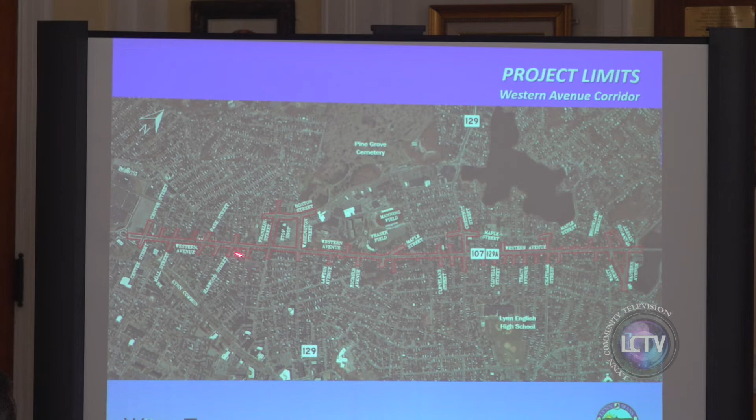So it includes that. As we continue up the project along Western Ave, Maple Street, where it comes out near Bayview, and then once we get close by right here, it includes the Chestnut Street intersection, and then down to the Maple Street and Chestnut Street intersection. All that kind of works together.

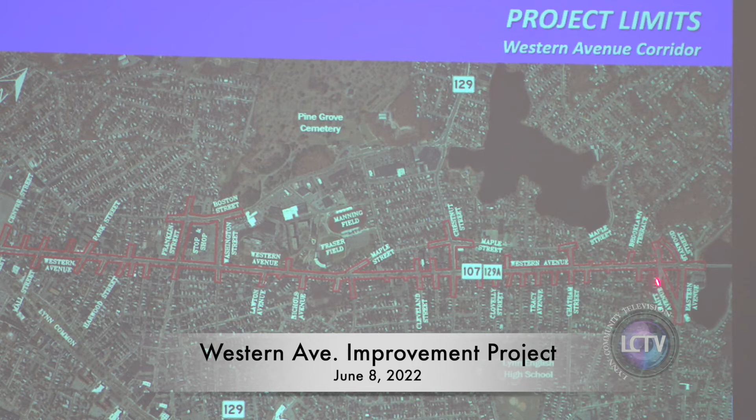And then as we continue up all the way to Eastern Ave, that loop around portions of Wade and Eastern, and then we don't quite get to the roundabout down here, but certainly the legs of the intersection. So you can see it's a pretty extensive project. It's about 10,000 linear feet, so it's almost 2 miles.

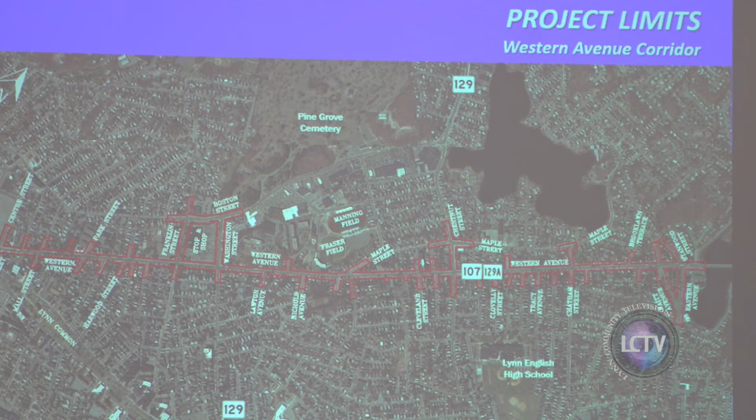Some of the key locations on the project, obviously you can see where the traffic signals are. Those are all signalized intersections. We're also going to look at things like the intersection of Park Street. We all know what that's like as well. A lot of traffic is one way, but certainly a lot of traffic.

I used to live on Park Street. Actually, I was born on Park Street. Well, not born in Union Hospital, because that's not there. Any case, you know, all my history.

But all of these signalized intersections, key locations, signalized intersection at Wade and Western Ave, but also there's no signal at Eastern Ave at Western Ave. How many of you had an easy job getting out of there? Nobody, right? So that's why we're looking at that. Likely signalized intersection here, but where we have signalized intersections that are close by to each other, those are all coordinated together so that they work together so that we're getting good progression along the corridor.

Alan's our senior traffic engineer at WorldTech, and if we have questions about that later, Alan can go over those with you as well.

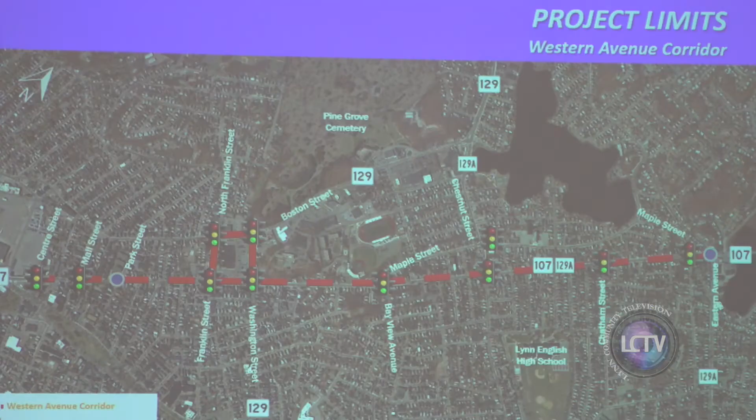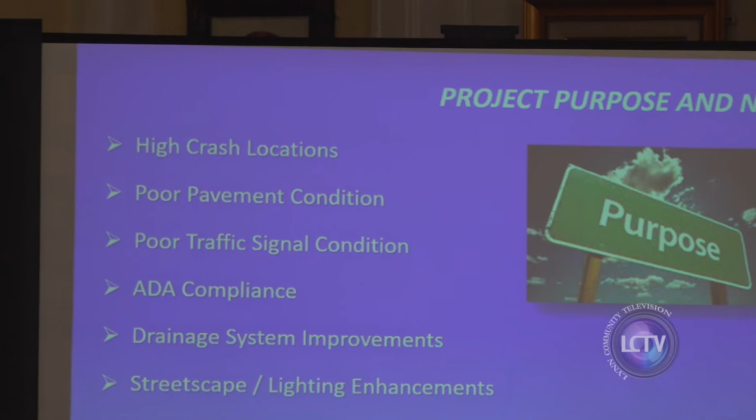So again, purpose and need, why are we doing this? There are several high crash locations that have been identified by MassDOT along the corridor. The pavement condition is poor. Traffic signal coordination - you get a green light and you stop at the next light, right? And then you stop at the next light. Having great progression going down the street.

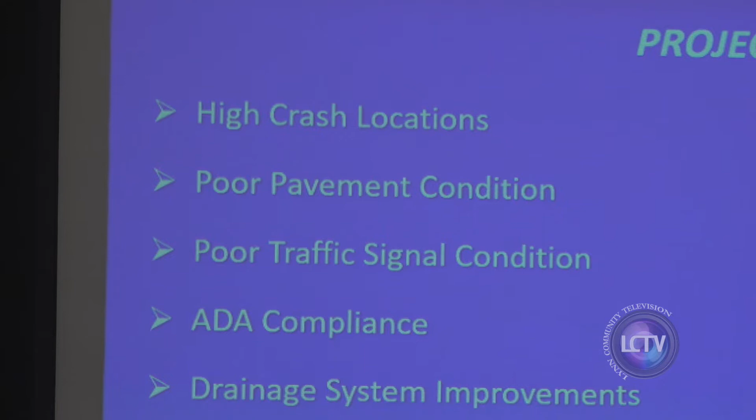ADA compliance is pretty much non-existent. Drainage system improvements, streetscape and lighting enhancements where we can do that. Consolidating bus stop locations, enhancing bus stop locations. We'll be working with the MBTA to coordinate improvements from their perspective. We'll be doing that early on. And really, this is a complete streets project.

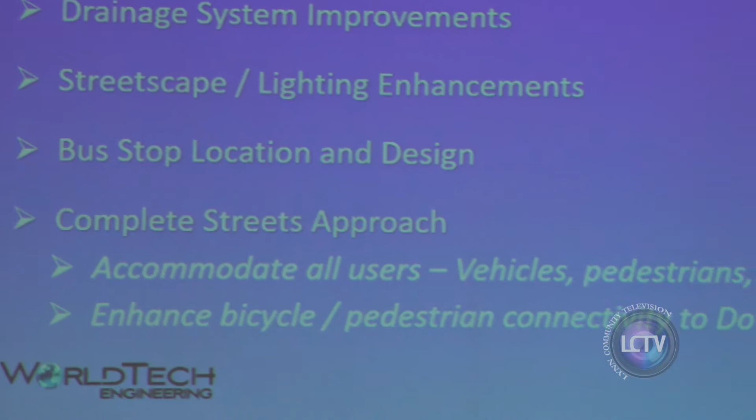So what does that mean? We're accommodating all users, right? So it's vehicles, it's pedestrians, it's bicycles, and it's transit, all of that. And that's part of MassDOT's healthy transportation policy.

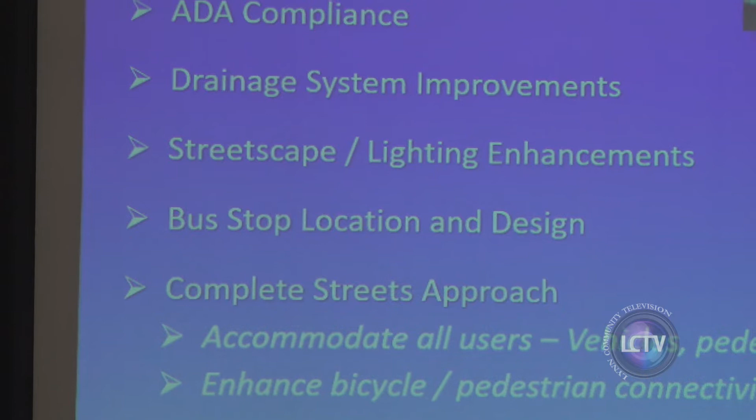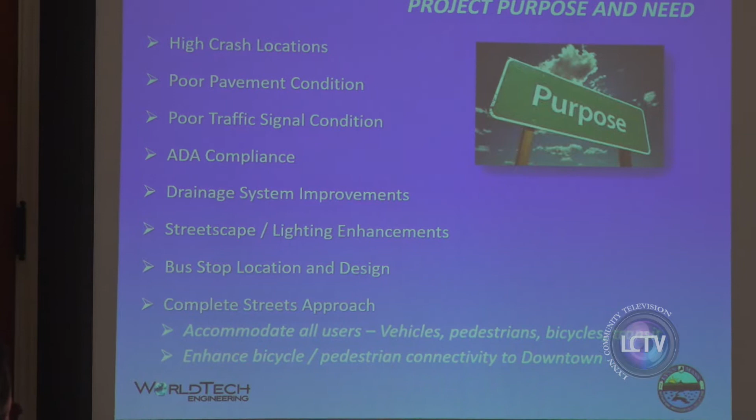Also, as part of that, enhancing bicycle and pedestrian connectivity. We know that right now we have the Northern Strand coming through Lynn. More and more commuters are using bicycles now. Western Ave doesn't really accommodate that, and so we want to make sure that we're incorporating that as well.

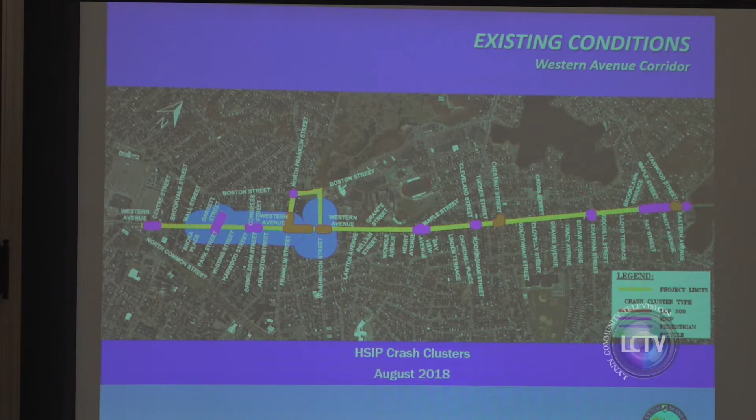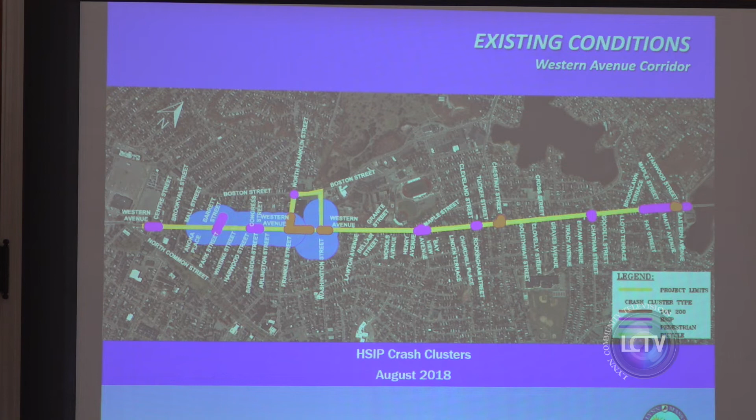Some of the existing conditions, you heard me talk about the high crash locations, right? So these blue areas are pedestrian crash clusters. These purple areas are just HSIP locations. That means Highway Safety Improvement Program. That's been identified as high crash occurrence locations. And you can see where they are.

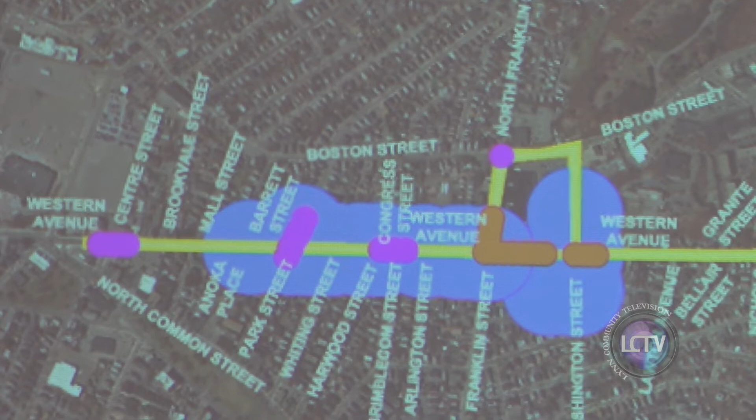And then you can see top 200. So MassDOT identifies high crash intersections. They have a list of the worst 200 intersections in the Commonwealth. And several of them are located on Western Ave. And so that will be addressed as part of this as well.

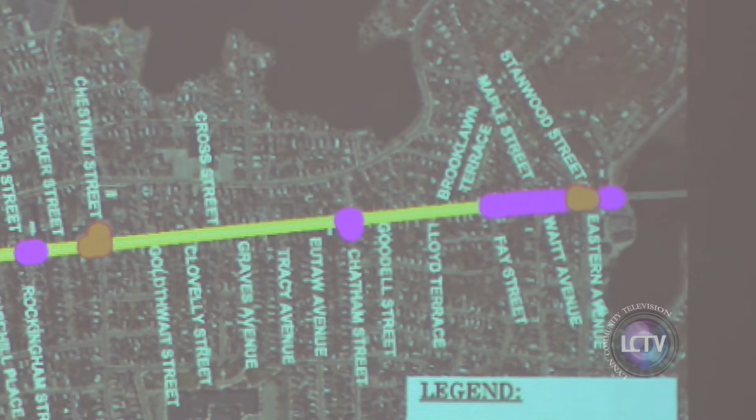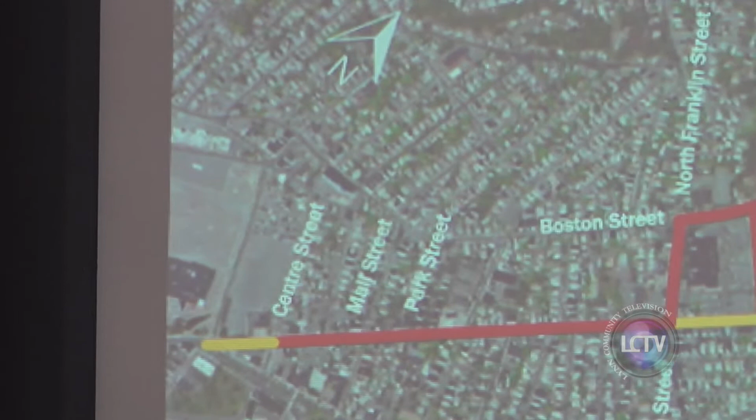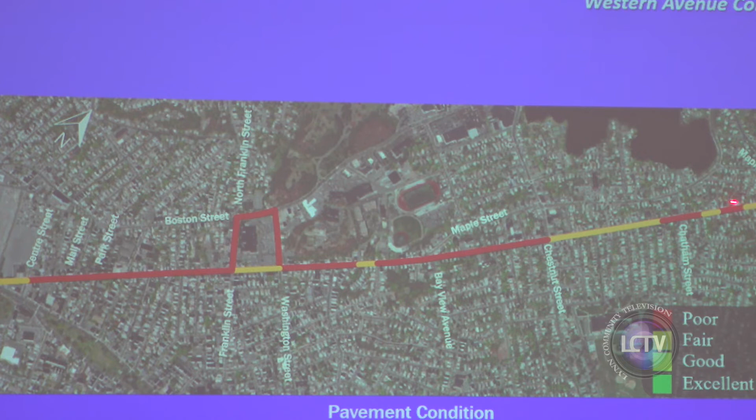Similarly, the pavement condition - we took this off the MassDOT road inventory file, and you can see that this red is poor pavement, and I don't have to tell you that. Right? Poor pavement condition, especially around Boston Street, around Washington, Franklin Street, these parts of Western Ave. There's a couple of places that are in fair condition. There's one place that's in good condition, which is right down here near Eastern Avenue. The rest of it is fair, so you can see it's fair to poor condition throughout the corridor.

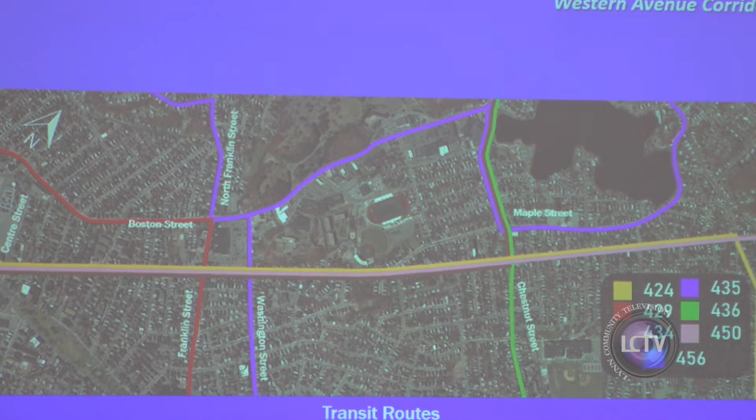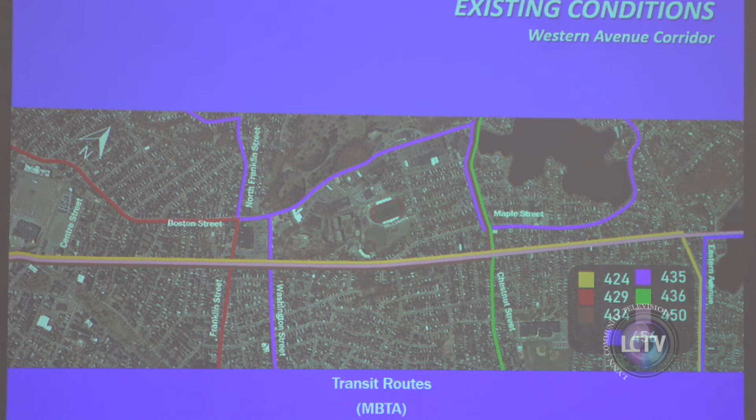Western Ave is a heavy transit route. You can see all of the MBTA transit routes. Several of them go down Western Ave. So it's going to be important to enhance transit opportunities along Western Ave with bus stops, working with the MBTA on things like transit signal priority, which allows the buses to get through more easily. And so that'll be part of it as well. But this just gives you an idea of all the bus routes, the 7 bus routes that are either on Western Ave or in proximity to Western Ave.

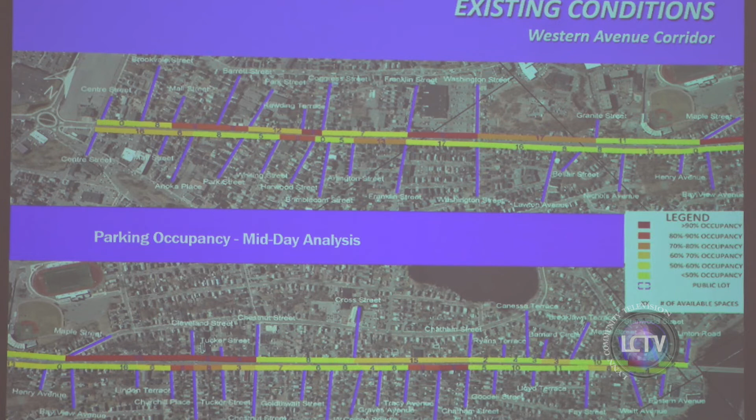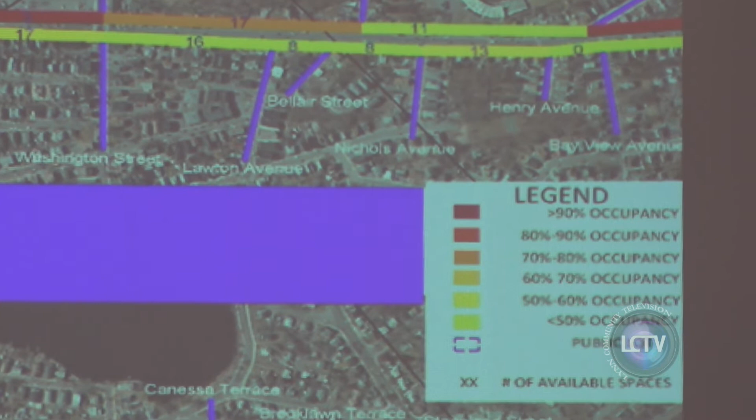We also did a parking inventory because we know that's going to be really important to a lot of the businesses along Western Ave. You can see by this map, and the colors don't show up that great, but you can see where these red bars are. This is the midday analysis - that's greater than 90% occupancy, whereas in other areas the occupancy isn't that great.

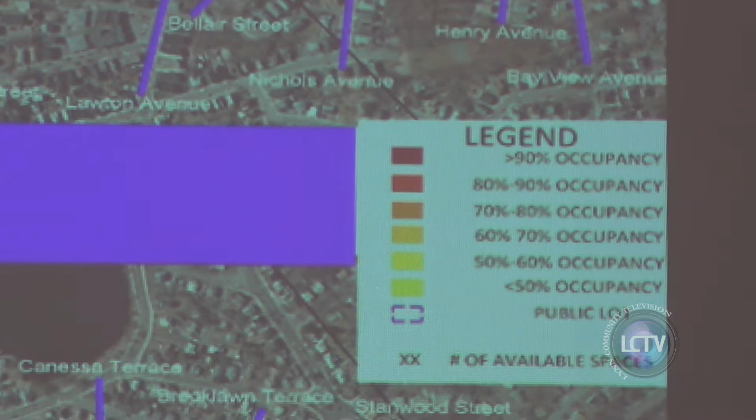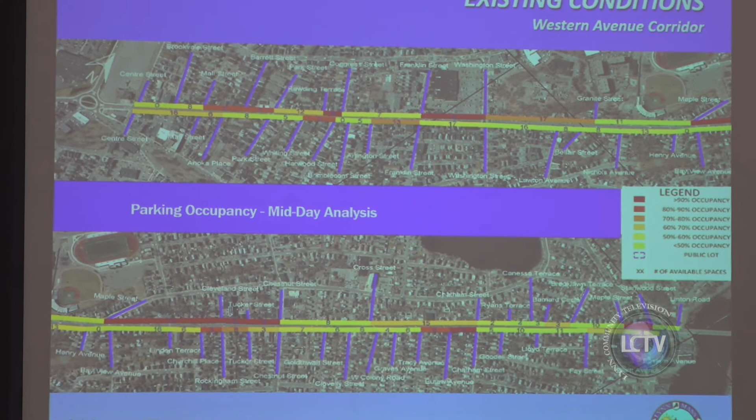So this is going to be a balance. And when we talk about these projects, because there's so many competing interests, it's really about balance. Can we make the corridor just for bicycles? No. Can we make the corridor just for transit? No. Can we make it just for vehicles? No. It has to be a balance, and that's why we do this analysis.

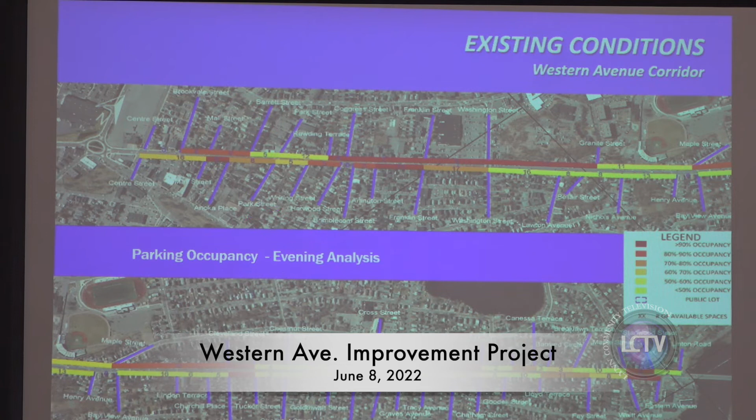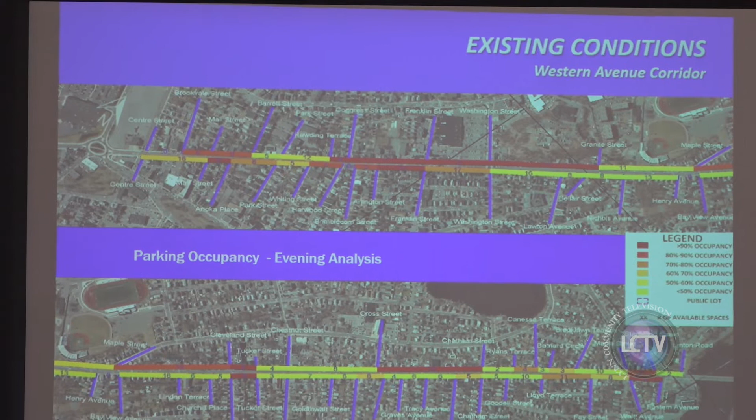So again, this is the midday analysis. We also did an evening analysis - you can see how that changes with the occupancy. It's really, really high occupancy on the corridor at night. So we have an idea of what that is. Where can we balance this? Because we don't want to take parking away, but at the same time we're going to have to accommodate bikes and pedestrians, as well as transit stops.

And a lot of times when we do the parking inventory, we find that some of the parking that's out there that we're eliminating was illegal in the first place - too close to a corner, next to somebody's driveway, things like that. So we take all of that into account as we start going through our design process.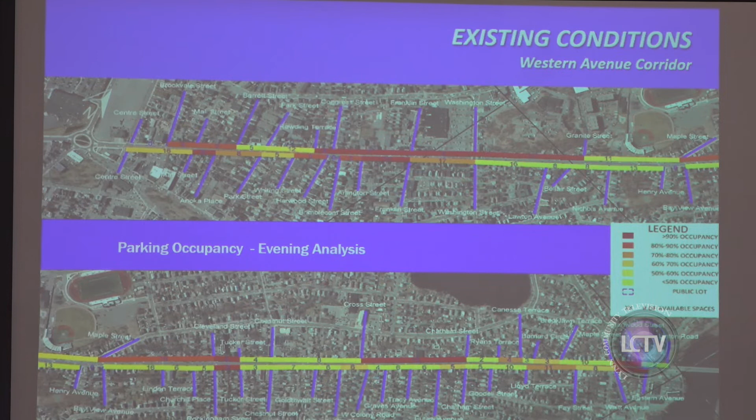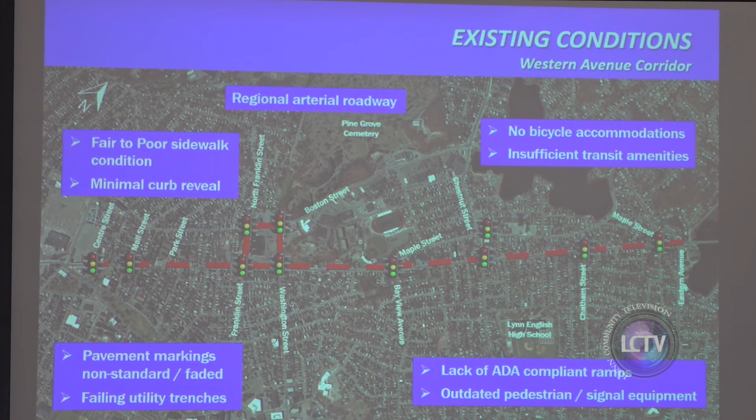Existing conditions, as I mentioned: this is a regional arterial roadway, poor pavement condition, minimal curb reveal, pavement markings that are either faded or not standard markings, utility trenches all around the place, bicycle accommodation is non-existent, insufficient transit amenities, so you can see that. And again, I can say, you know, we live here, I grew up here, but I'm preaching to the choir - you folks know what this is like.

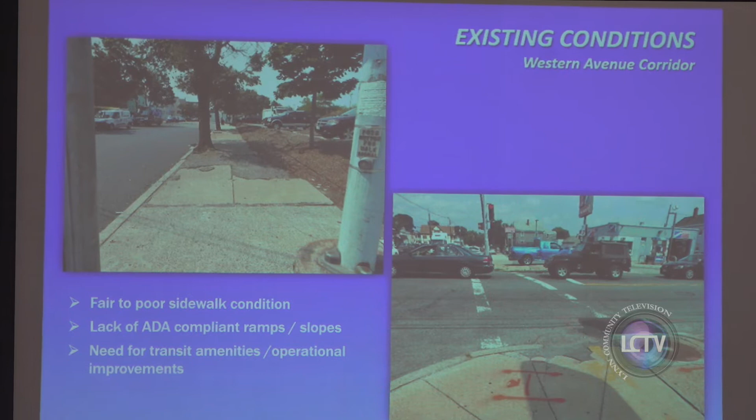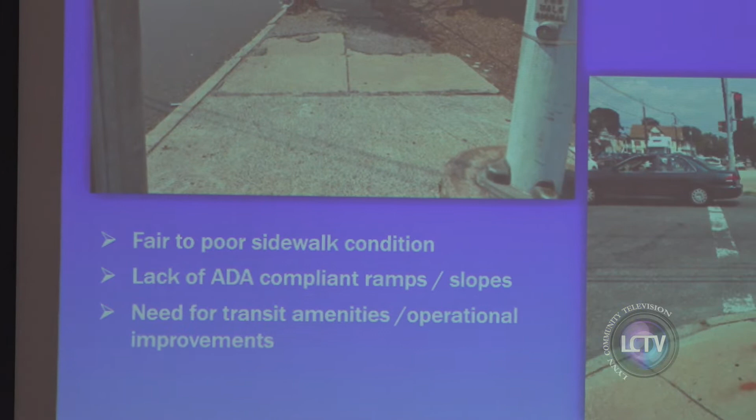So again, just some pictures to show what we're talking about. I believe this is probably right by Stop and Shop on Western Ave, but you can see the pavement condition - it's either tripping hazards, or broken concrete, or a combination of concrete, and so we put some asphalt in it to keep it smooth. You can see in the bottom photo right here, lack of handicap accessibility.

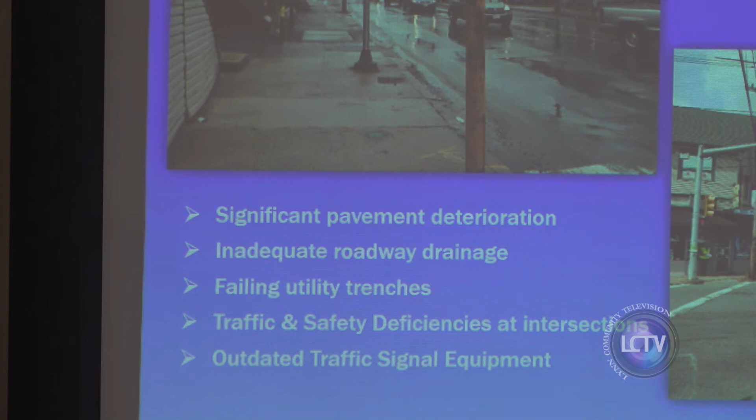All of these kinds of things are what will be included in this project, and I'm going to talk a little bit about what the project will include in a few minutes. Again, pavement deterioration, roadway drainage, all needs to be upgraded as part of the project. Traffic deficiencies at the intersections, we just talked about that. This one, as you know, is right down the street - this is Chestnut Street.

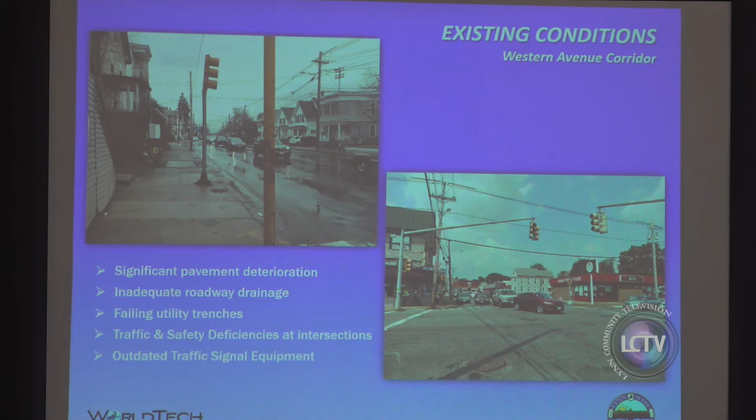A lot of vehicles, a lot of traffic, not well coordinated. The signal equipment is outdated. So again, existing conditions that we all know.

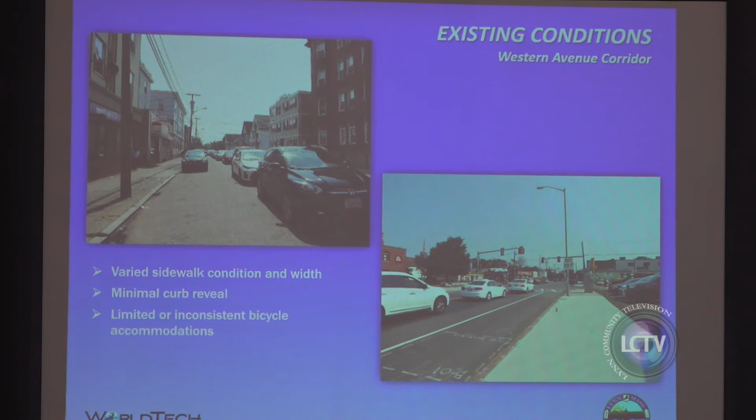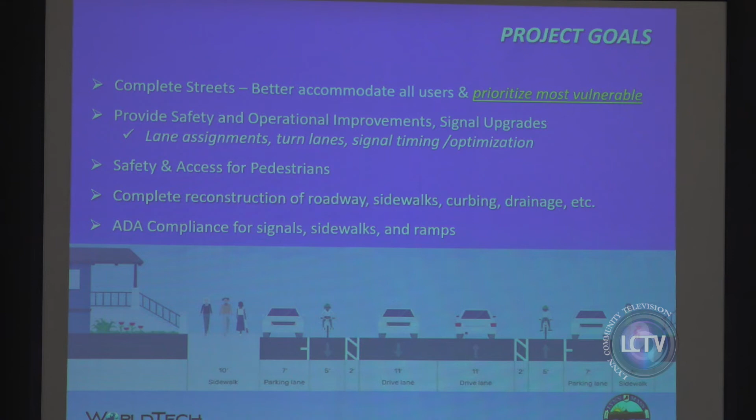So the project goals, as I mentioned: complete street to better accommodate all users and prioritize the most vulnerable - those folks that are not as mobile as others, we want to make sure we're prioritizing improvements for them. Providing safety and operational improvements, signal upgrades like lane assignments, turn lanes, signal timing optimization, safety and access for pedestrians. Complete reconstruction of the roadway - new pavement, new drainage, new curbing, new sidewalks, new traffic signals, streetscape amenities. This is the Cadillac of improvements, and in a minute you'll see the price tag.

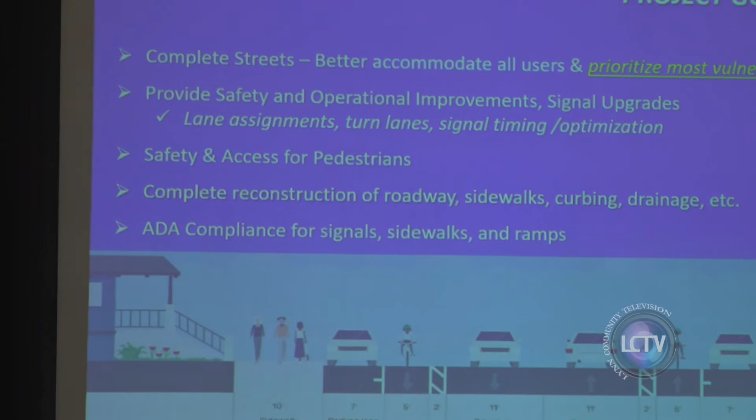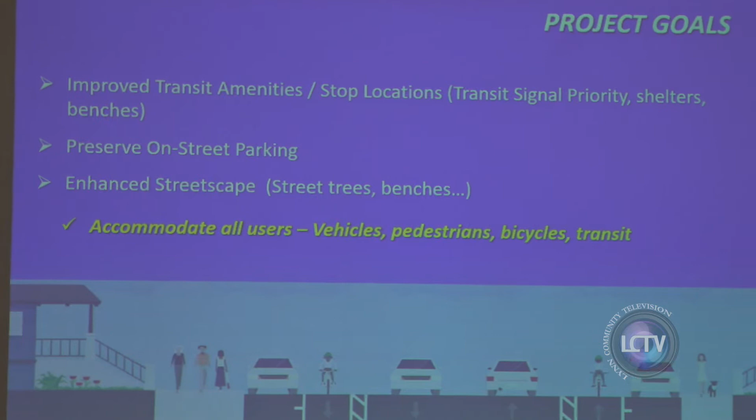And then, of course, ADA compliance for sidewalks, signals, and handicap ramps. Improve transit amenities - what does that mean too? Well, transit signal priority, as I mentioned, so the buses can get through better, but also shelters, bus shelters, and benches, providing enhanced transit amenities for those folks who take the bus every day.

Preserve on-street parking to the greatest extent we can. Will some parking be eliminated? Sure. But we want to make sure that we're keeping a balance of parking and bike lanes and all those other things that we need to fit into the project.

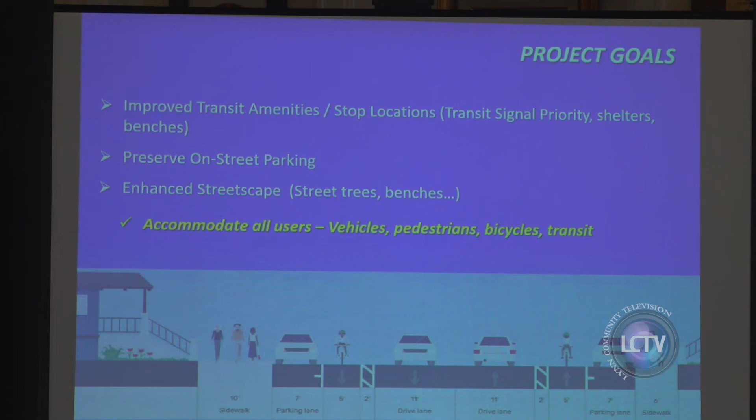As I mentioned, enhanced streetscape. Part of this project will include streetscape, trees and benches and placemaking and things like that. We want to accommodate all the users, and that is part of MassDOT's Healthy Transportation Policy.

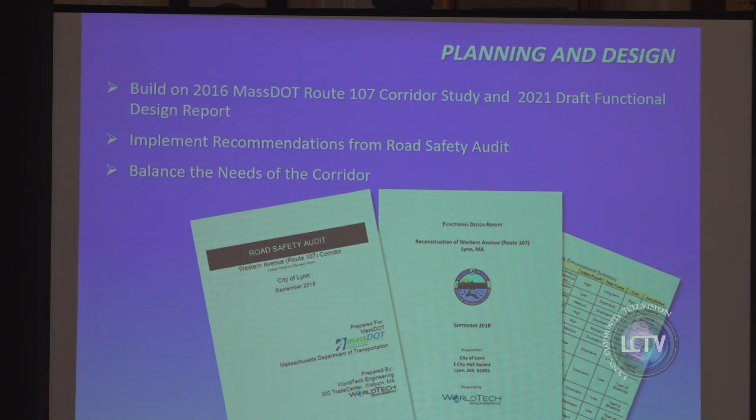As we go through this, there's been a lot of work already done. Back in 2016, MassDOT conducted a study of Route 107, which went from Chestnut Street into Salem. We also completed in 2018, and updated in 2021, a functional design report, which is an extensive traffic study of the entire corridor. We look at all sorts of things, accidents, capacity, and all sorts of things included in that.

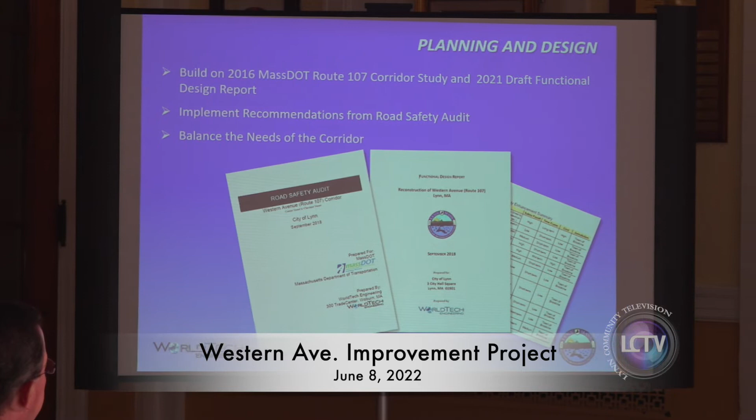There was also a road safety audit, which is required whenever there are HSIP locations on a project. MassDOT requires a roadway safety audit, and so that was completed. That's this document right here. And we're looking at all of these things so we can get a good understanding of what the necessities are out there and what's needed.

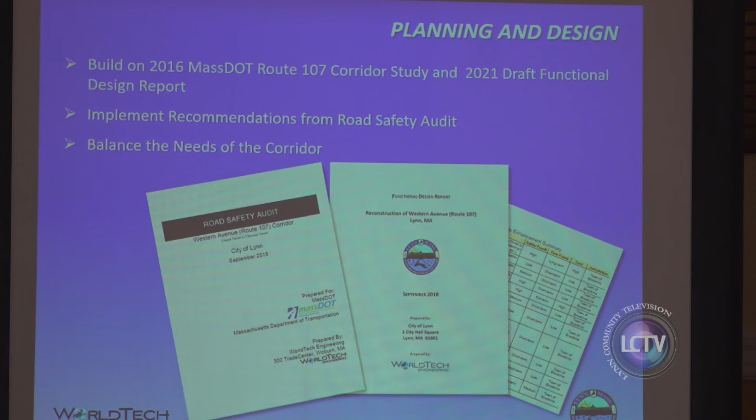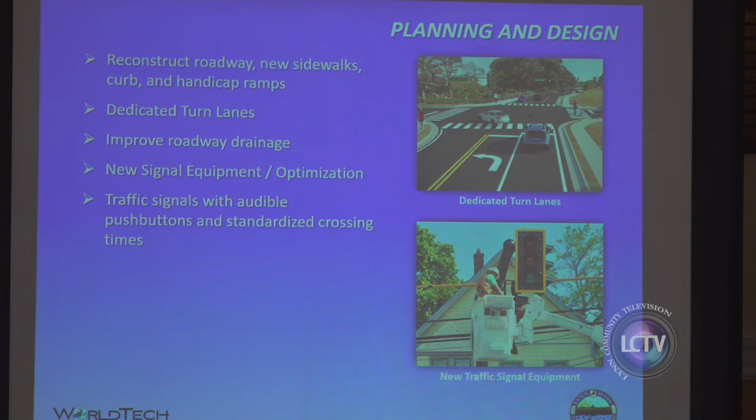I'll say it again, balancing the needs of the corridor. Part of the plan and design, as I mentioned, adding some new features to the roadway: turn lanes, dedicated turn lanes, improving drainage, new signal equipment, which includes things like audible push buttons for pedestrians, and things like that.

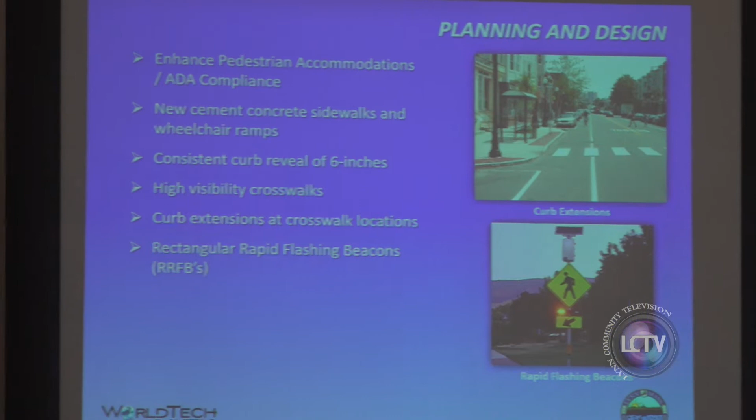Enhancing pedestrian accommodation and ADA compliance, concrete sidewalks, as I mentioned, making the curb reveal consistent at 6 inches. There's a lot of places along Western Ave where it's almost flush with the roadway. Curb extensions at crosswalk locations will make those crossing distances shorter, where we can do that.

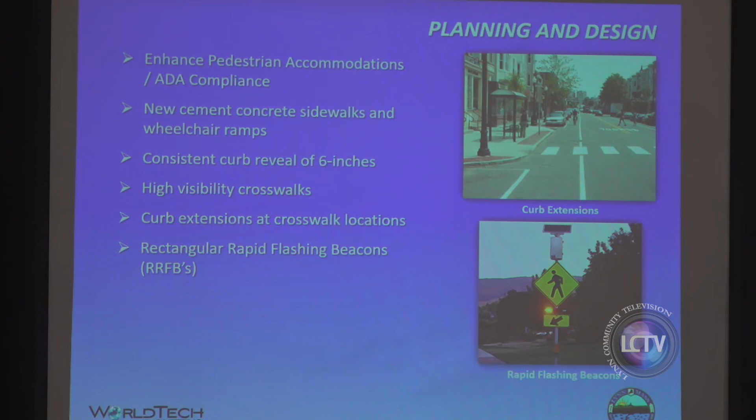In some locations, to assist in crossing, we're implementing rapid flashing beacons where we don't have signalized intersections. For example, from Park Street to Franklin Street it's just a straight run, but we know there's a playground up there and some other areas where pedestrians may want to cross. If we're identifying locations that would require enhanced safety for crossing, that's where we might include a flashing beacon.

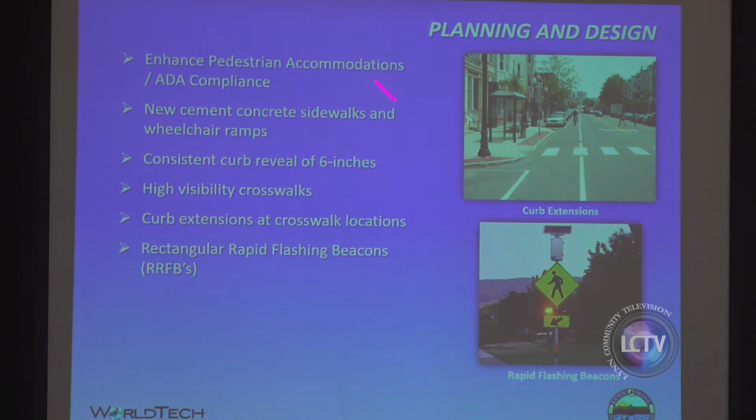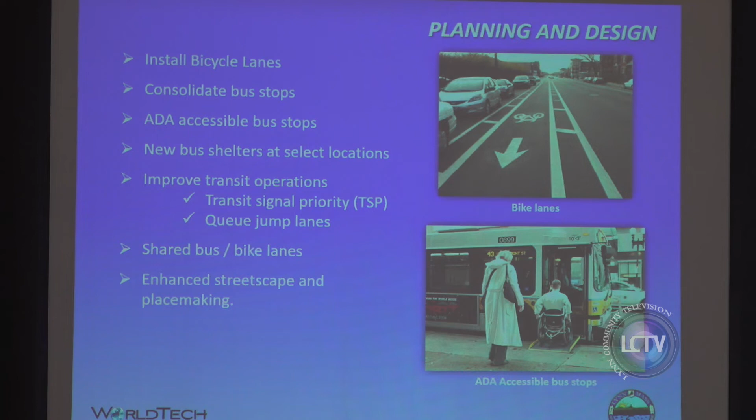I'll talk a little bit about the review process. This project will have a lot of public engagement. We hope the public will be engaged with the project. We want the public's input. This is a city project, but you all live in the city, so to the extent we can tailor this to the specific needs of the city, we want to try and do that. Having said that, we still have to fall within certain design guidelines and things of that nature.

But we want to get this project in front of the public, and it's great to see the councils here tonight. That's awesome, because you guys are obviously going to be the voice of the project as well.

So again, the process will be meeting with municipal leaders, meeting with stakeholders. Part of this process is education and guidance, because we always get, well, we want you to fix it but don't change anything, or why can't we do this, or why can't we do that. It's up to us to help you understand how this process works, so there's a lot of education and guidance that we're looking for.

We're developing a website. Aaron, I don't know if you want to talk about the website. Sure, I'm Aaron Clausen, the city planner.

As Rich pointed out, public engagement is a really important part of the planning and design aspect of reconstruction of the corridor. So the planning department has created a web page, essentially a project page for a number of the different projects going on in the city right now. One of them just went live tonight for this project, lynncommon.com, and there's a project page for Western Ave. That's a great place to get an overview of the project itself.

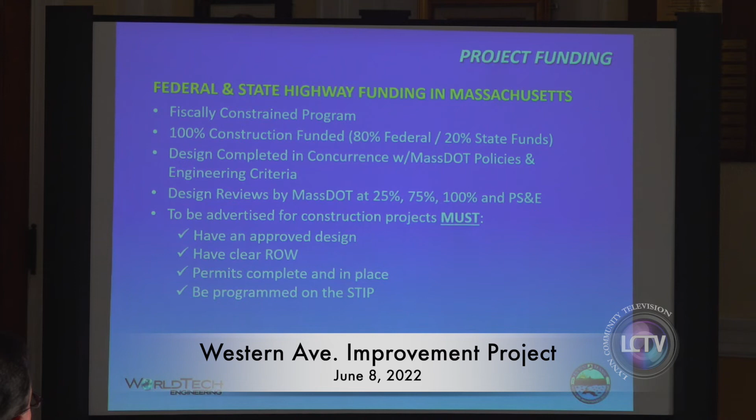One thing I want to say about design reviews: when this project goes to MassDOT for, say, its 25% review, it doesn't go to one person. It goes to several departments - right-of-way, traffic, highway design, environmental, and the landscape section. It goes to several sections at MassDOT in Boston and at their district office in Arlington. So there are a lot of people looking at this thing when it goes in for review.

So it's, as I said, a very extensive review process. As I mentioned, municipal requirements, design, environmental permitting, and right-of-way. It has to meet MassDOT design criteria. As we mentioned, this is a complete street project, so it has to meet MassDOT's Healthy Transportation Policy Directive.

The first phase of this project will culminate at the MassDOT official design public hearing, and that's once the 25% design phase has been approved. MassDOT will then hold an official design public hearing. The city will host it, but it's a MassDOT hearing on this project.

What we like to do, especially at WorldTech, is we like to have meetings like this all through the design phase. Not only just preliminary design, but as we go through the design phase, because we want to make sure we're answering as many questions as possible, that the public has an understanding of the project and what's involved with it.

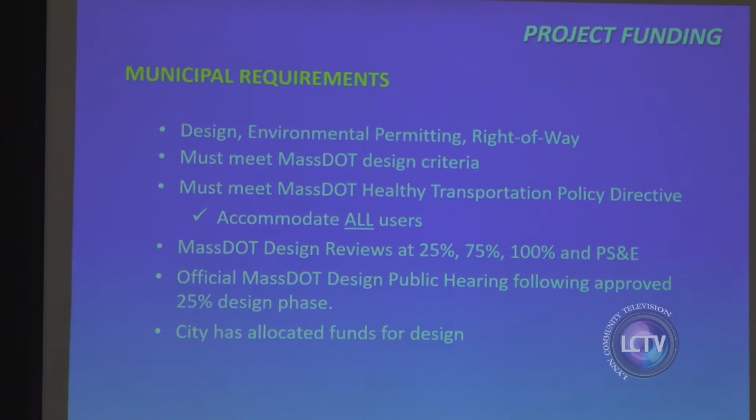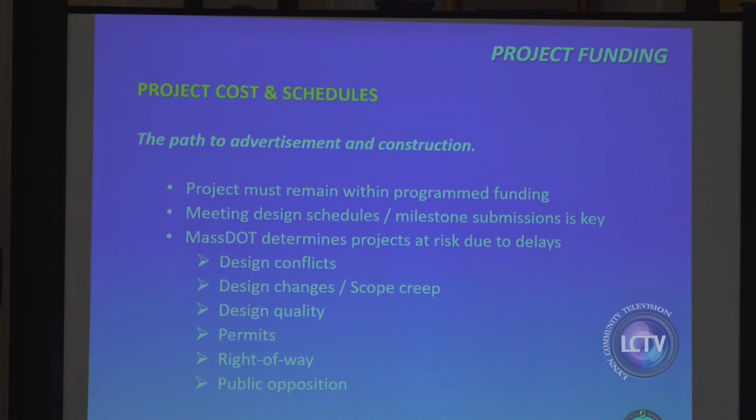Having said that, the path to advertising and construction - as I mentioned, the project needs to be maintained on the TIP, which we have no doubt it will. We have to meet the design schedules and milestones. Some of the things MassDOT looks at as the design goes through - we have to submit an updated schedule monthly to MassDOT.

And this schedule is, how many pages, Bill? 8 or 9 pages? It's every aspect of the project in minute detail. But some of the things that MassDOT looks at are, do we have design conflicts, are there design changes?

One of the things the MPO is always concerned about is scope creep. We're going from 7th Street to Eastern Ave. Well, the next thing you know, we're going down Franklin Street and we're at the Commons, and by the time we're done, we're at the Lynnway. That's one of the things we have to keep in mind. There is limited funding for the project, and at the same time, we need to keep the scope of work as to what was approved initially by the PRC.

They look at things like design quality, permits, right-of-way - that'll be extensive on a project of this magnitude, and when I say right-of-way, things like temporary easements. Just to give you an idea of what that means: the contractor is building a sidewalk, he needs to step on somebody's property to nail the form in for the sidewalk. Just that step on the property, we need a construction easement. Federal highway requires that. So it's things like that.

Again, is it a major hurdle? No, it just takes time. Usually that process starts during the latter part of the 75% design phase, so that's a little ways away.

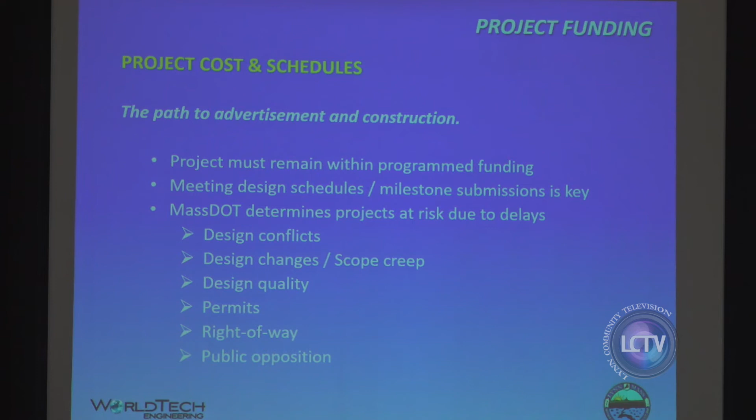And then one of the things DOT also looks at is public opposition. If they come out for the design public hearing and a room's filled with people with spears and war paint, they don't feel too good about that. So we want to make sure we've answered as many questions as possible as we go through the process.

One of the opportunities with a project like this, and I'm glad we have some of the councils here tonight, is non-participating work versus participating work. Well, what does that mean? Participating work is all of those things I told you were included in the project - sidewalks and paving and all those things. Non-participating work are things the city may want to include with the project because it's part of a bigger project, and they get the benefit of the road being open.

So for example, let's say we need to replace the water main because it's 150 years old. This is an opportunity to do that. The city, or in this case the sewer department, would have to establish a force account with MassDOT, but that work can be included with the project. We have a project in Everett right now, a $33 million reconstruction of Ferry Street - they're including a replacement of their water main as part of that project, so it provides a cost benefit because it's part of the bigger project.

So those are some of the things that might be non-participating work - things like betterments. Or if the city wants certain streetscape upgrades - MassDOT is going to include a certain amount of streetscape upgrades, but there are some things the city may want to enhance. Well, those things may end up being non-participating because they're not eligible for funding. So it's things like that.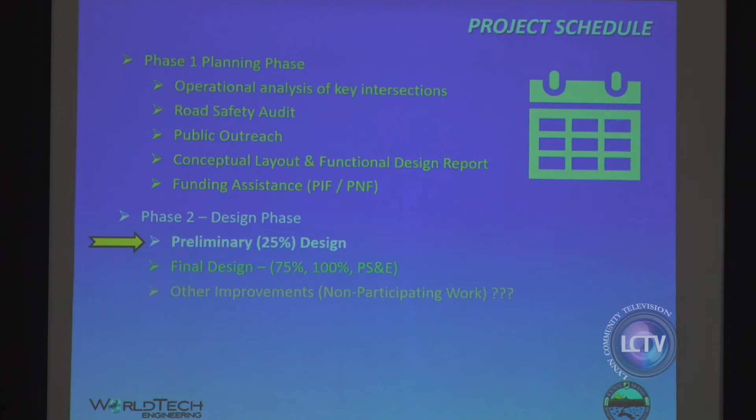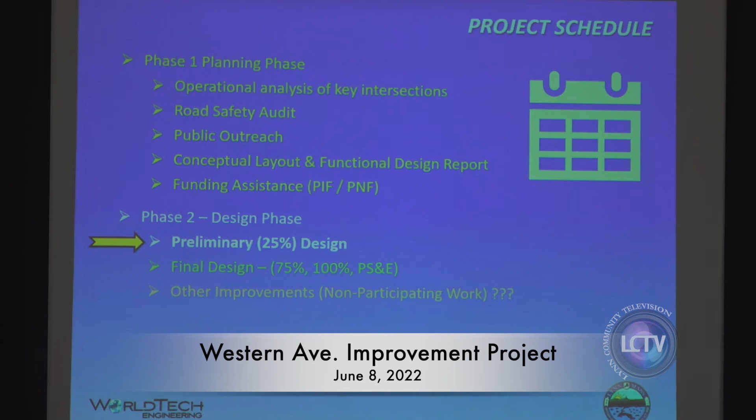Project schedule, the planning phase we're through with. You heard me talk about that. The road safety audit, we did some public outreach. I know Councilor Sauber hosted one of those down at the police station early on.

Right now, as you can see, we're in the preliminary design phase. Once we get through the MassDOT design public hearing, we'll move on to the final design phase.

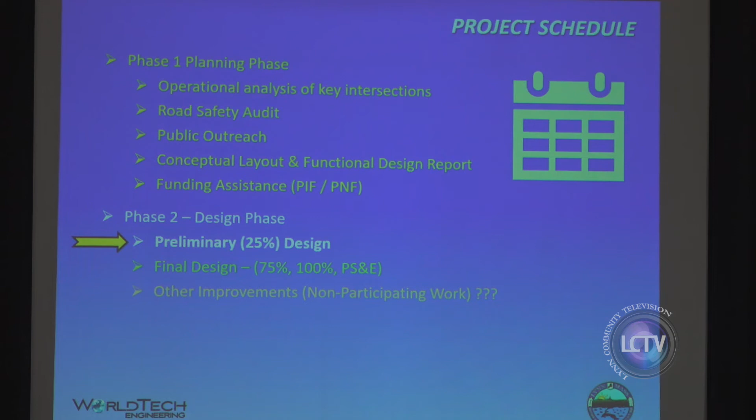What's included with the preliminary design phase? Well, the topographic survey and base plans, that has been completed. We finished with that. We started with our pre-25% design scoping meeting with MassDOT.

I believe there'll be more of that to come, just to identify some of the matters that have come up between us as the design team and MassDOT, so that we're all on the same page.

There's a document called the Design Justification Workbook. Any part of this project where we cannot comply with MassDOT standard, we have to include that in the Design Justification Workbook, and that has to be approved by DOT.

So let's say, for example, we can't put a bike lane in. That has to be justified. They want to know why. And so there's a process that goes with that.

Really, the reason I have the next bullet highlighted is the preliminary design is really developing the horizontal and vertical alignment of the corridor. So a lot of people will be saying, so where are you going to put the benches, where are the trees going? We don't get to that until after the preliminary design. Really, the preliminary design phase is establishing horizontal and vertical alignment.

Are we looking at other things? Sure. Are we looking at traffic signal, general sequence and timing kind of things? We're looking at all of that stuff. But it's really horizontal and vertical alignment that is what we're establishing.

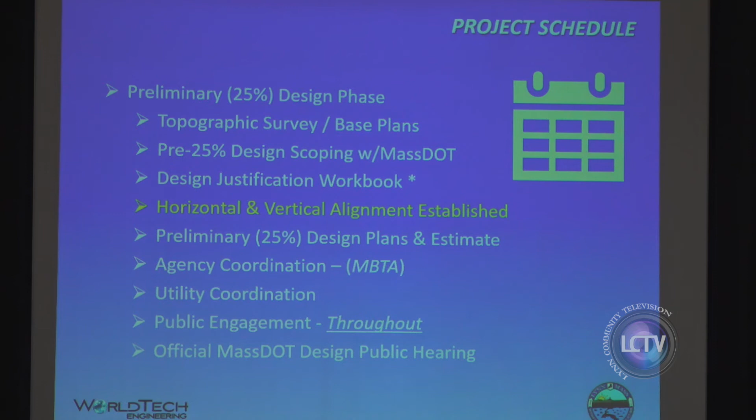Sorry, just on that, how soon are they notified so that they can work it into their budget? They're notified, well, when we submit the 25% design phase, once that's approved, MassDOT's utility section will send that to all the utility providers. So it's probably a couple of years at least in advance of when the project comes.

And the other important part of that is MassDOT has an incentive for the utility providers. They will pay 50% of the utility relocation cost if the utility provider gets their stuff out of the way within a certain time, within the schedule. So that's an incentive for them. If they have to replace boom poles or whatever, it's a $4 million cost to them.

If they get this stuff done timely, they get half that money back, which is a benefit.

Richard, if I could just real briefly on that question, there's already been coordination with Lynn Water and Sewer so that they know this project is coming and can build it into their capital plan, so they can benefit from improvements to the street, meaning the water lines, sewer lines, and drain lines can all be done together. That coordination has already happened.

Was there any coordination reaching outside communities like the MWRA through Western Ave? I don't know if the MWRA is affected in this case, but all utility providers will be notified. I believe MWRA may have assets in that roadway, so whoever's there will be notified.

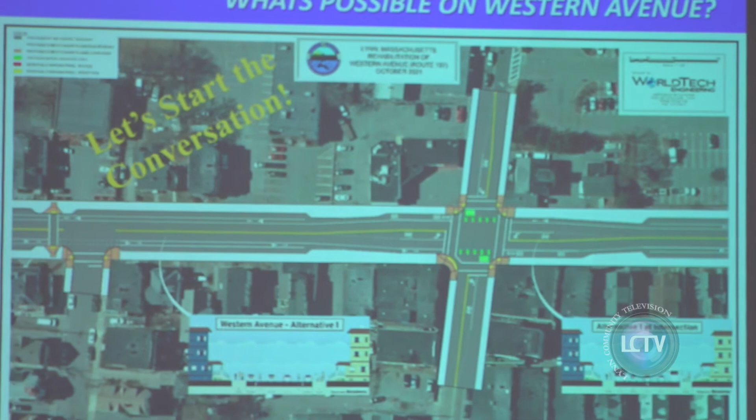We're going to show 3 alternatives that we were reviewing, just at one intersection—we're not going along the entire corridor because we haven't gotten to that design level yet. This was based off the survey, though, so at least we know what fits, which is a little more accurate than going off the aerial.

So, alternative 1—I'll zoom to the next slide. At a number of intersections, we're looking at doing left turn pockets when we can. That's going to be a process as we go through, because of the parking study done earlier—sometimes that's where there's a conflict. Generally we're not wiping out huge swaths of parking along the entire outside of the road, because we know parking is important along this corridor. But when we deal with MBTA buses and any turn pockets, that'll be a process we're working through quite a bit.

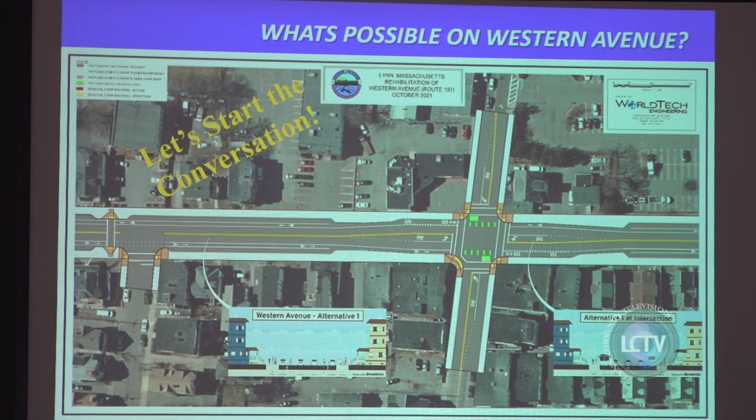So alternative 1, we looked at putting on-road bike lanes onto Western Avenue. Kate kind of gave away the results, but I'll go to the next one anyway. Here's a zoomed-in cross section for alternative 1: essentially keeping the sidewalks about where they were, keeping the parking lane, and fitting an on-road 5-foot wide bike lane, along with 2 11-foot wide travel lanes.

Putting in a bike lane is a requirement of the MassDOT Healthy Transportation Directive. However, this is also a busy roadway—anything over 10,000 vehicles per day needs not just lanes but buffered bike lanes or some kind of step-up accommodation for bicyclists. This design doesn't have room for a buffered bike lane. We already talked to MassDOT's Complete Streets group, and they said that's not going to fly, because we're at 18,000 vehicles per day, and this corridor shows a high likelihood of bicycling. So we've already been told this isn't going to go very far if we try submitting something like this.

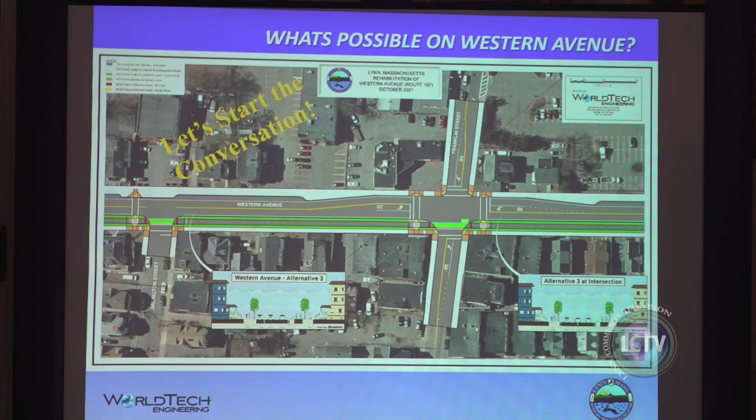So here we picked the south side. One thing you always worry about is a lot of curb cuts - how many curb cuts do you have? Because every curb cut is a conflict point at the driveway. So we wanted to see what we could fit in. If we want to try to fit this in, we could fit in a 2-way separated bike lane on one side of the road. It would be narrow, it's 8 feet wide, so it's a little on the narrower side.

Of course, it's only bikes - pedestrians still have their own space, a separate sidewalk, so you don't have the bike-pedestrian interaction, which can be a concern when you're in an urban area. When you're a lot more rural, that's when you put in a shared use path, and if volumes are low enough for both, it's not so much an issue. But once you get a little more urban, it's great - you can separate the bicyclists from the pedestrians.

So this was kind of an alternative we're looking at as well. Nothing's been decided yet - I guess that's the main point I want to get across. And we'd like to hear your concerns, and if you particularly like something, let us know that too. I think that's it, Al.

And I think that's the discussion and input - a lot of what Al was talking about is that this is not necessarily one size fits all. This is a long corridor, we're going from Market Square all the way to Eastern Ave, so it's not necessarily one size fits all. There may be different segments of Western Ave that will have a different treatment, a different process. That's something we have to go through as we start the preliminary design phase and look at that horizontal alignment - how does everything fit? A lot of times we're trying to fit 10 pounds in a 5-pound bag, right? We have all of these things that we need to do, all of these users that need to be accommodated.